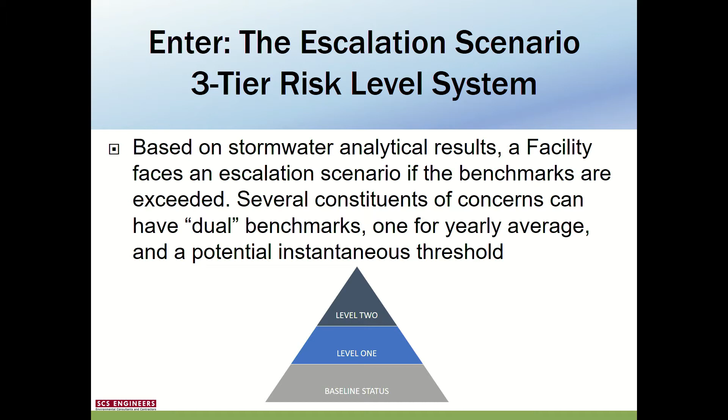I'll just say this, level 2 is not the Platinum Club. It's not the place that we want to be. We'd rather stay down here in the basement, right? Kind of mind our own business, not have a high profile, and not be on ERA level 2 or the highest parameter.

So again, if we look at this, reporting year 1, to me, when it starts and you know you might have an ERA level 1 problem, it's almost like the clock is ticking. What can you do? What source control can you employ? What can you do as far as minimum, advanced, and other BMPs to get your site ready? So we look at our reporting year number 1. Number 2, the facility moves to ERA level 2, and then reporting year 3.

So again, as I said, Washington, Oregon, and California already have some type of this exceedance response action mechanism in place. The state of Washington, or the Department of Ecology, has already put their permit in place, and it's a 3-level approach for corrective actions or further implementation of your BMPs. This scenario, by the way, is more explicit than the California permit. Ours are more general. This one is a little more explicit in what you do in your tiered response.

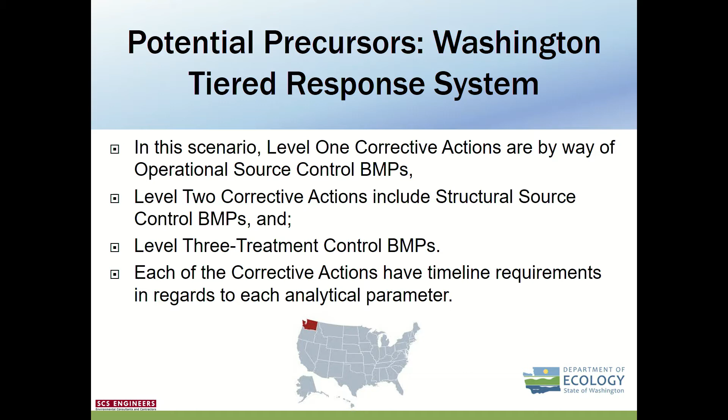So in level 1, we got corrective actions by way of operational source control BMPs. Level 2 may contain structural source controls. And level 3, treatment control BMPs up to and including active treatment systems. So in Oregon, the recent 1200Z general permit also has a built-in tiered risk level set of actions for impairment pollutants and benchmark exceedances.

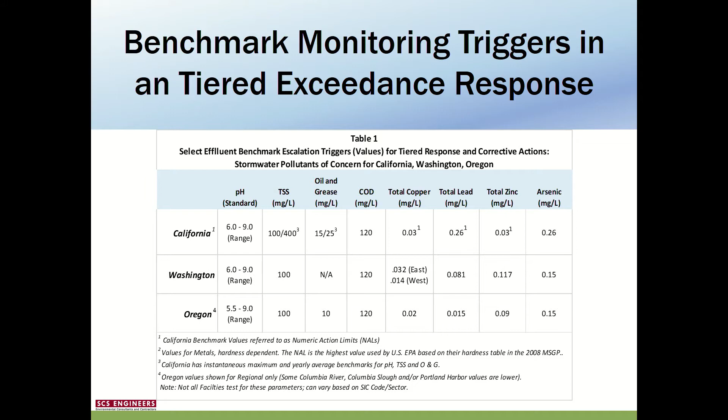Here we have a quick look at some of the benchmark exceedances in California, Washington, and Oregon. You'll see some commonalities in some of the parameters and constituents of concern, but there are also some ranges that are a little bit different, and based on either physical characteristics of the watershed or other items, including stakeholder input and/or political items, they do change and have some fluctuation.

So that being said, here in California, for the remainder of today, we're going to focus on potential precursors and what we've experienced in California. So as we know, the current industrial general permit is our third one: 1991, 1997, and then our next one that was adopted on April 1st of 2014, brought into full effect on July 1st of 2015. So if our stormwater reporting year or fiscal year goes from July 1st to June 30th, we're currently in our 4th year. We've just started our 4th year.

So we've also felt the trials and tribulations and some of those growing pains as we've come into this exceedance response mechanism and model. It's worth looking back, and we know that the permitting process was a long one for this permit since the '97 permit. They're roughly renewed every 5 years. To the board's credit, they put a lot of work into this and listened to a lot of stakeholder input. Sometimes it seemed much longer than it could or should have been, but it was a good, solid effort coming into the July 1st of 2015 reporting year.

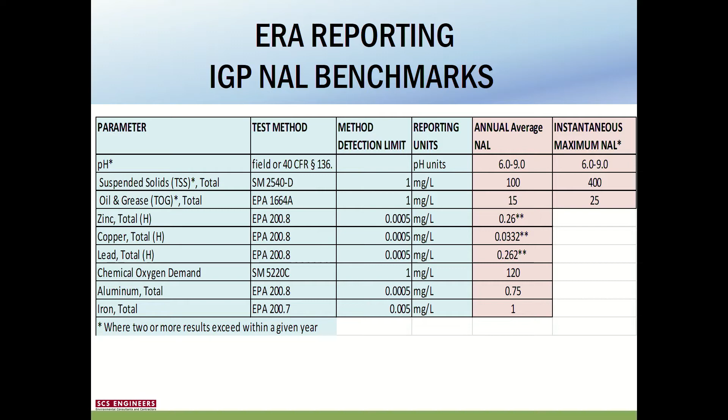So we'll look at a couple of the benchmarks here. We do have an additional column on this side, and that's for your instantaneous maximum. All those other constituents of concern, your typical ones, pH, oil and grease, TSS, and then some SIC code ones of some metals, maybe COD, other constituents of concern. All of those are yearly averages. For our top three, pH, TSS, and oil and grease, they have two standards or benchmarks as these numeric action limits by which they're judged.

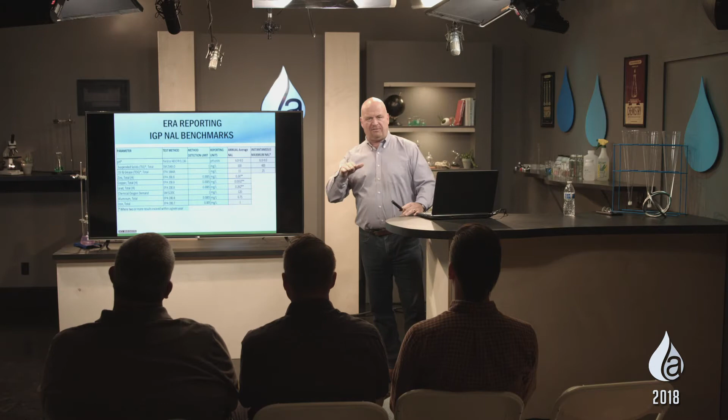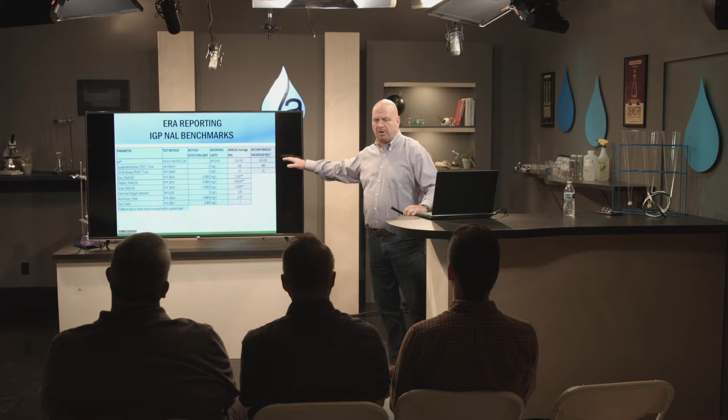So the range of pH 6.0 to 9.0, we have total suspended solids. On the lower level, on a yearly average, it's 100 milligrams per liter or parts per million, and then an instantaneous maximum. Instantaneous maximum, by the way, is not a perfect term because it's actually if it happens twice. So it could be an event, could be different qualifying storm events, but it's important to keep that in mind. And then of course, oil and grease, you have a lower benchmark of 15 for the yearly average, and then we also have 25 milligrams per liter for the upper part of the instantaneous maximum.

So a little thought and a little bit of discussion regarding the exceedance response actions under NALs or numeric action limits. Simply put, they're the EPA benchmarks our California state permit has put forward to compare your analytical results of your constituents of concern. So it's not intended to purely serve as a technology-based or water quality numeric effluent limitations. And we know from the stakeholder input early on that there was a lot of talk of perhaps effluent limits. So if you break an effluent limit, you essentially broke the permit, but with a numeric action limit, you don't break the permit unless you do not follow the prescribed method to implement further your BMPs and to stay on track as the industrial general permit requires.

So that being said, a discharger that does not fully comply with the ERA level 1 or level 2 status is in violation of the general permit. So very important there. And if it's a violation of the general permit, it's a violation of the Clean Water Act.

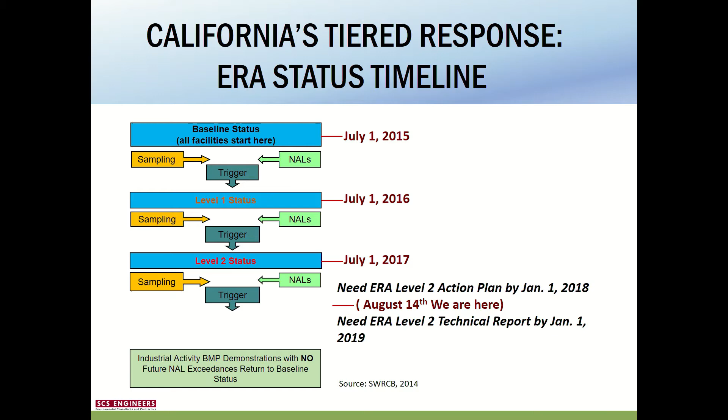So as we said, we were administratively brought forth in April of 2014 to be fully adopted and live on July 1st of 2015. We started there. Then you take your sampling, your NALs, you'd compare them, then it would trigger, if you were over them, you go into ERA level 1. Then through that reporting year, you could go to ERA level 2 for the following year. So that's where we're at.

So this being the 4th year, at the 3rd level, we're going to see in a slide or two here that you have to put in place, first of all, for the ERA report, a QISP, a qualified industrial stormwater professional, visit the site and do a walkthrough by October 1st of that year. Then on or before January 1st of the next year, you have to have a report in place for either an ERA level 1 or an ERA level 2, where many sites last year had ERA level 2 action plans in place, and now coming up on January 1st of 19 is our due date, on or before, that we have to prepare an ERA level 2 technical report.

So the first year going forward, we know that there were approximately 9,000 dischargers with required reporting, and now I believe we're up to somewhere in the neighborhood of 12,000, which means we have 10,000 NOI dischargers and approximately 2,000 NECs. I still believe there's only about 200 NONAs or of that sort. So of those sites that first year that actually took analytical samples, and not all of them did, 3,100 facilities became ERA level 1. After that, for the immediate following year and subsequent time, approximately 1,000 facilities went into ERA level 2.

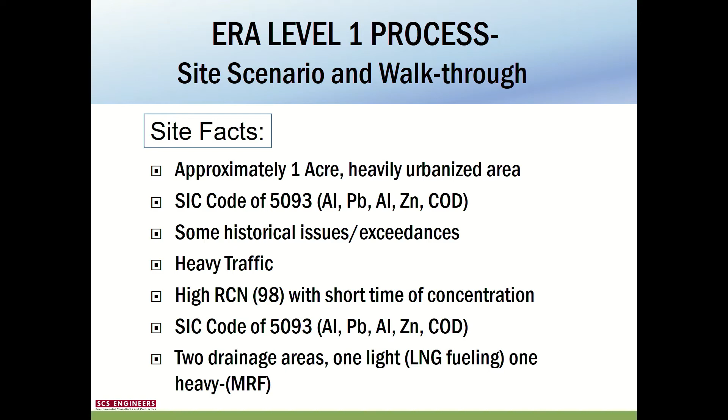So what does this tiered approach to stormwater look like going through California? We're going to just quickly look at a current facility we have. It's an approximately 1 acre site. It's a MRF, or materials recovery facility, and recycler. We have an SIC code of 5093. Certainly has some historic issues, as many in that SIC battle. We have very heavy traffic there, also typical, and a high runoff curve. It's almost 100% impervious: rooftops, concrete, asphalt concrete, and other. We'll just give it a runoff curve of 98.

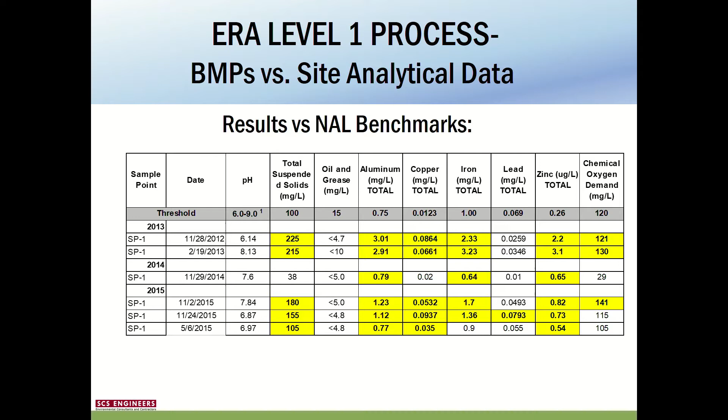So we have 2 drainage areas. One light, which is a liquid natural gas fueling area, and we also have a heavier side with the transfer center, also some maintenance areas. Luckily, the majority of the maintenance area goes directly to sanitary sewer. Looking at some old benchmarks, the yellow is the exceedances. So obviously we had some difficulties, even under the old permit. As we moved forward, we took a little additional look at this site, divided it up into some areas to see what we could do as far as BMPs and what items were within the site.

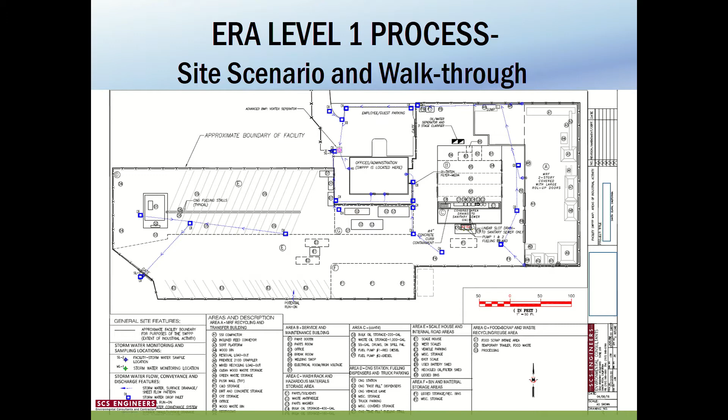So some of the conclusions real quickly: we knew that there were high total metals concentrations over numeric action limits. The COD was all over the place. That was the one thing that we could not hold constant based on deliveries, truck traffic, the loads and things. That was a hard one. pH has always generally been within range. And the maintenance area was going to sanitary sewer, so in that area we're good with the oil and grease. So we started at baseline, had some lingering issues that probably weren't addressed under the old permit. It's about the time that we came in. And then we went above some NALs that triggered an ERA Level 1 status.

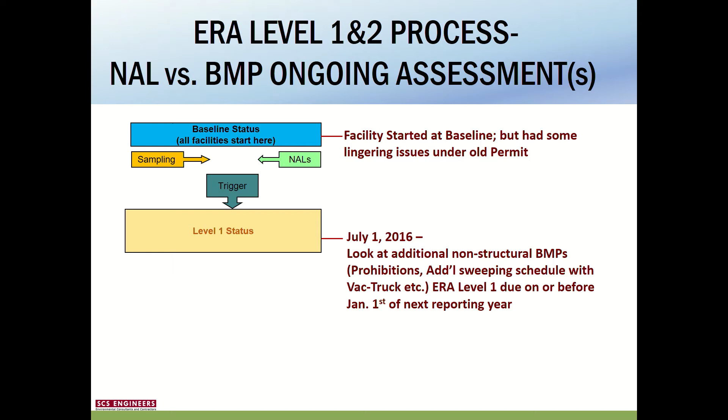So that Level 1 status, really, what are you doing? What kind of arrows do you have in your quiver to go forward? So at that time, in terms of feasibility, you want to look at policies, procedures, and prohibitions. Non-structural BMPs. What can we do for source control? Can we say, don't do this outside when it's raining? Can we bring some things inside? Can we cover some additional areas for structural BMPs? What can we do without getting too far down the rabbit hole of some advanced BMPs?

So then we go into July 1st, 2016. We filed our annual report in June before that, and now we become an ERA Level 1. We're going to review the site activities. One of the things I found very important, whether you do it or one of your staff, or if you're a discharger, one of your staff and the consultant perhaps, ask the boots on the ground personnel, the people that were there during the sampling or during the year, did anything happen or did anything change?

You know, I've had sites where I've personally observed sheen, and it didn't seem like it fit the site, and I went upstream and found out that a hydraulic hose broke on a Cat loader. So that was a big deal that day, and we wanted to write it up as a potential exception and know that that happened.

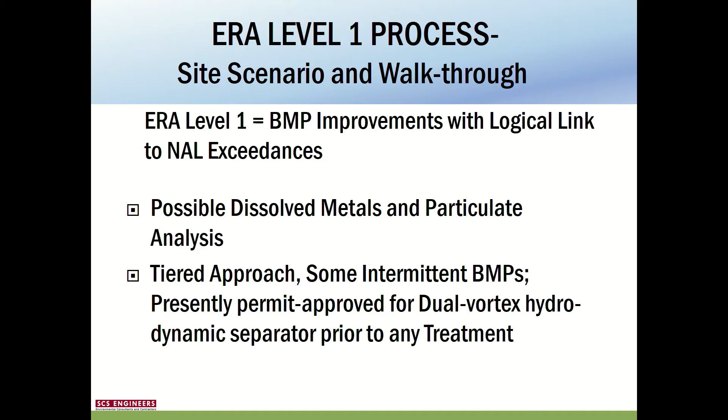In this specific attack, right? To me, it's know your enemy. It's the art of war, right? So what are we looking at here? We're looking at metals exceedances, TSS overages, and what can we do to bring those down? So again, the tiered approach. We did realize that there could possibly be some dissolved metals, and we might want to do a particulate analysis, right? First and foremost, we're thinking that TSS could be tied to the metals, but there's other things that we had to look at as well.

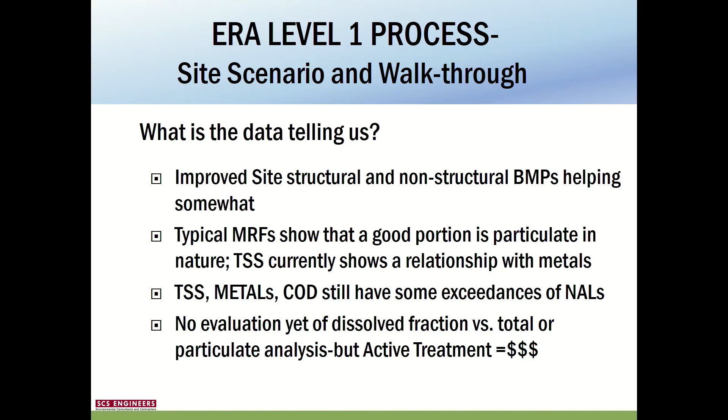So that being said, our definite improvement was in some areas with minimum and additional BMPs. Believe it or not, even hand sweeping around bollards and things right before they do the sweeper truck actually seemed like visually those observations had improved somewhat. For a typical MRF or a transfer center in this situation, we know that a good portion of it is particulate, and hopefully it has a little bit of a relationship with TSS. So that's what we looked at pretty strong. At that point, we did not get to further characterization of the stormwater quality though. We were looking at what we could do to eliminate the TSS first and then potentially the metals second.

So then we increased the frequency of regenerative vac sweeping. We also tried REM Triton filters. Those worked fairly well, but in some of the qualifying storm events, we noticed that they were getting overtopped, and perhaps it wasn't a full drainage survey. And based on some very easy back-of-the-napkin calcs, I think that they were overrun by some heavier areas of discharge. Intermediate BMP, we also went with some sorb socks and metal locks, which actually showed significant improvement, and that helped also. So these are all kind of your low-cost intermediate BMPs that you really want to try first if you can, and you have the location and the discharge areas to do that in your drainage management area, and see if those can help.

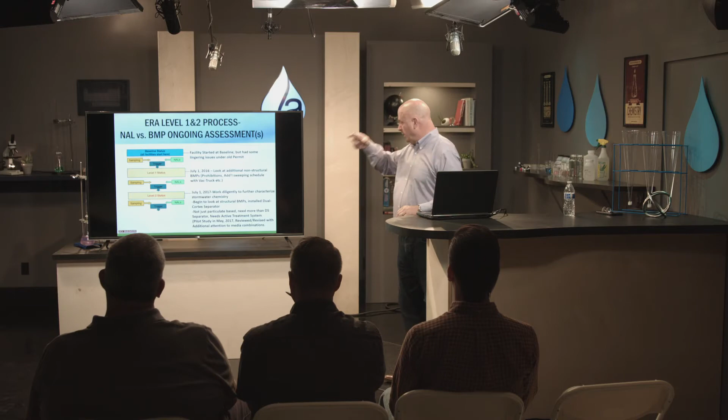So then you'd have the QISP or a QISP trainer of record like us, we'd certify that and say, here's our evaluation summary, here's what we saw, and here's what we're going to do, our first step and intermediate step going towards reducing and/or eliminating pollutants of concern in stormwater. So here we go. We are at baseline July 1st of 2016 after the annual report. We enter into level 1 status. We did some extra things.

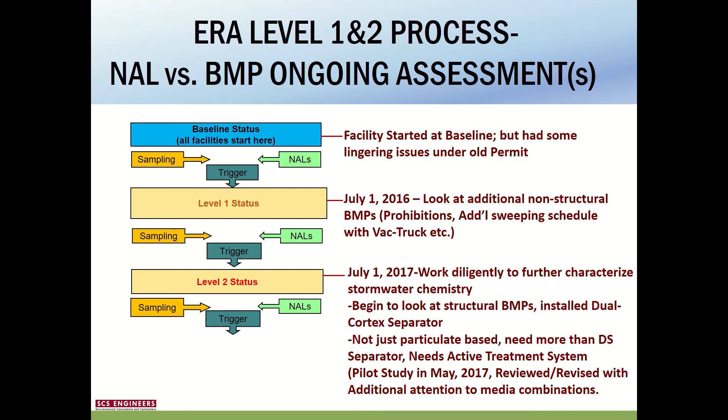July 1st, 2017, we worked diligently. We started characterizing the stormwater chemistry, and we started really having to take a look at it. So again, our thought was, if we can reduce the TSS enough, we can maybe get those metals down. And what you're going to see here is with the installation of the hydrodynamic dual vortex separator, we found that the TSS did drop out, and we got some good results. However, we got to a law of diminishing returns. The iron, the aluminum, and zinc were high enough that it wasn't all particulate.

So that means we're going to move into a dissolved. And when you hear dissolved, generally speaking, we start to talk about active treatment systems, right? And we know how expensive that goes. So let's look back at the ERA level 2 reporting schema.

The level 2 ERA action plan requires a discharger to propose actions necessary to complete the level 2 ERA technical report and the demonstrations the discharger has selected. We know that we have basically door number 1, door number 2, and door number 3. 3 options, right, for going down the ERA level 2, and what demonstrations we're going to use.

And also the board recognizes there may be a combination of those, and you may not know them all until you do further characterizations, investigations, maybe some additional water quality chemistry analysis. But you want to look at this as a whole going into your ERA level 2 action plan.

Now remember, the action plan comes on January 1st of the first year after you go to that level, and then 1 year later on January 1st, on or by it, you want to have the technical report which supports your action plan and what you found.

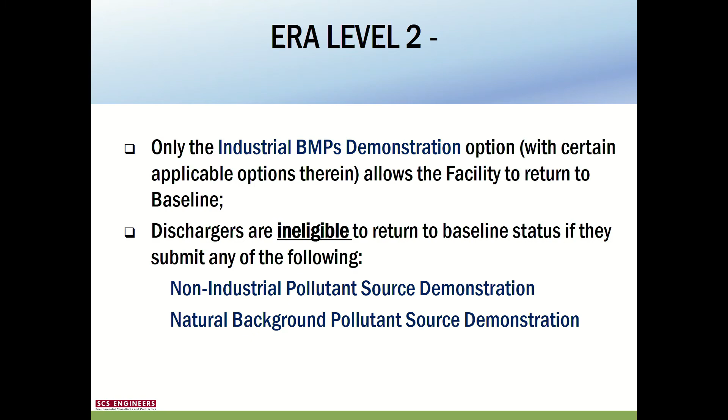And I don't know if you remember, but Greg Gearheart coined it almost 5 years ago at our California Stormwater meeting in North Lake Tahoe. I'll never forget it. He called it ERA level 2 purgatory. And it is somewhere that you do not want to be.

So one of the things we're going to look at now is, what's my exposure, or what happens if I become ERA level 2 and I can't get through that? And here's some of our lessons learned today.

So one thing, and I think that first year it was BNSF Railroad that came out and said, look, this permit came out pretty quick and we were not 100% prepared, we did not have 100% grip on it, and we have some budget constraints there. And that was a pretty big deal, and we'll talk a little bit about that. Then our other options on the table.

Is there any way that a NONA, or a notice of non-applicability, could be involved? And we've heard some really good talks on that in the past, and that's sometimes an option. We know there's not very many of them.

Our two options there, as I understand them, are only if we're not hydraulically connected, or if we can have a California licensed PE stamp a set of drawings that says we will not discharge, modeled and based on the largest series of historical storm events for that year. That's a pretty high bar and pretty hard to get, right? So your next option might be, can I get things inside?

Can I perhaps get closer to a non-exposure? It's a good point to mention too, for the MRF and Transfer Center and that small site, early on we looked at it, and there were two buildings with some large roof overhangs, and they brought in someone to look at perhaps covering the corridor and the areas in between there. That roof was about $150,000 to get it in and to cover both of them.